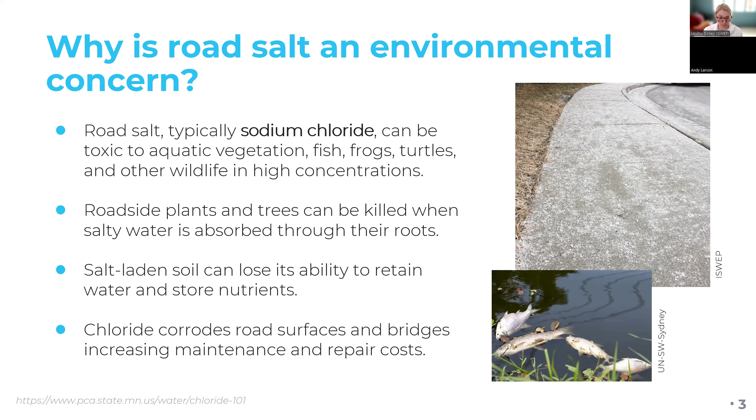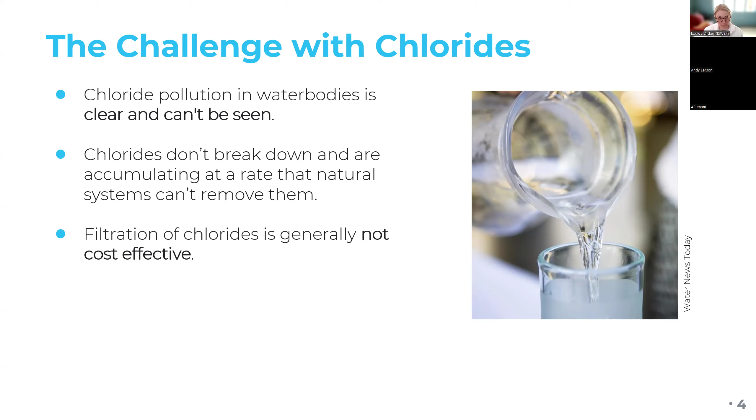Some challenges with chloride include that it is clear, so it dissolves in water and can't be seen. Water may look really clear and clean, but it could still have a high concentration of chloride. Chlorides also don't break down, so they accumulate in our groundwater, water systems, and soils, and there isn't a natural process to remove them. Filtration of chlorides is generally not cost effective - if you think about desalination, it can be very expensive. So we want to avoid getting to that point.

We also know that if we oversalt our streets, parking lots, and sidewalks, that can account for a significant portion of chloride pollution, especially here in the Midwest where we have cold weather. Salt dissolves very easily in water, which means it's very mobile in our environment. Excessive amounts of liquid deicers can also contain carbohydrates, and those can decrease the oxygen available in our water bodies for aquatic life.

Thinking about chloride specifically in Iowa, we are seeing increases in chloride concentrations in our water bodies in Iowa and across the whole US. We do have water sampling conducted here in the States by a myriad of groups, including the EPA, the Iowa DNR, the USGS. We also have a group in Polk County that conducts water sampling. There are also other sources of salts in addition to road salt - things like home water softeners, filtering from water plants, and industrial processes that use salt. Those are also sources that can introduce salt into our surface and groundwaters.

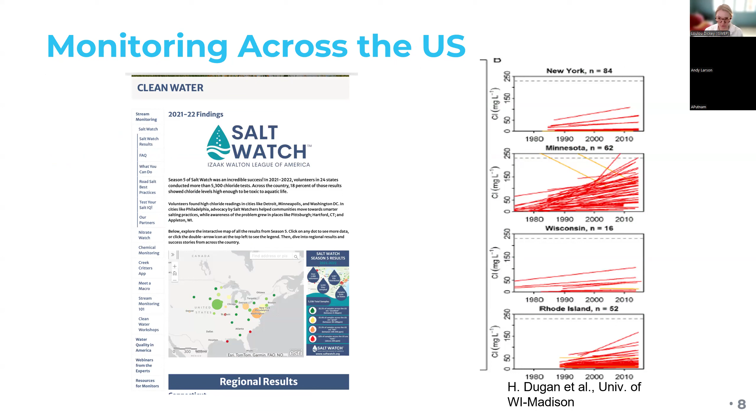The USGS also released a report on road salt use - this is a 2014 report. They found that 84% of urban streams studied had chloride concentrations that increased substantially over the study period from 1960 to 2011. There were numerous streams in the study that exceeded concentrations toxic to aquatic life. These concentrations were highest during the winter, but they also increased during all seasons over time, especially at northern sites. That's because salt builds up in our soils and can be flushed out during rainstorms throughout the season.

Streams with the lowest concentrations of chloride were in watersheds with small amounts of urban land cover. We know that's because we're applying those road salts, especially in our urban areas where we have lots of traffic and cars.

Thinking about water quality standards, especially in Iowa, we do have a water quality standard for chloride, and it provides several different standards based on maximum contaminant level for drinking water, and chronic and acute levels for aquatic life. The goal of these standards is to ensure that all Iowans have surface waters that are fishable and swimmable, and that water resources are protected to put to their best beneficial use.

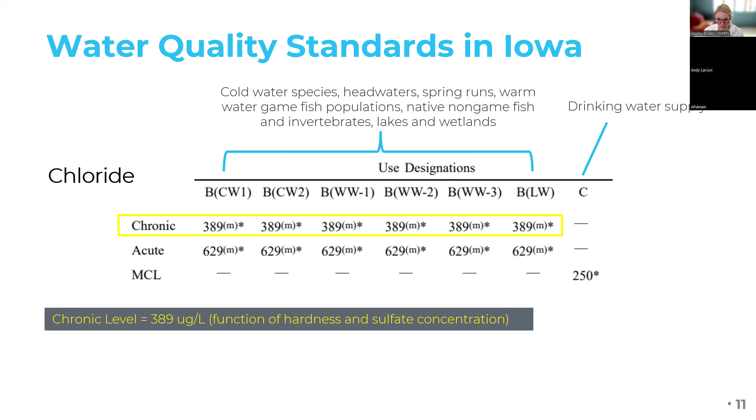Looking at our standards here in the state of Iowa, this first set relates to aquatic life like cold water species, as well as fish and game populations. Then we have our drinking water standard, which is our maximum contaminant level, and that drinking water standard is 250 milligrams per liter.

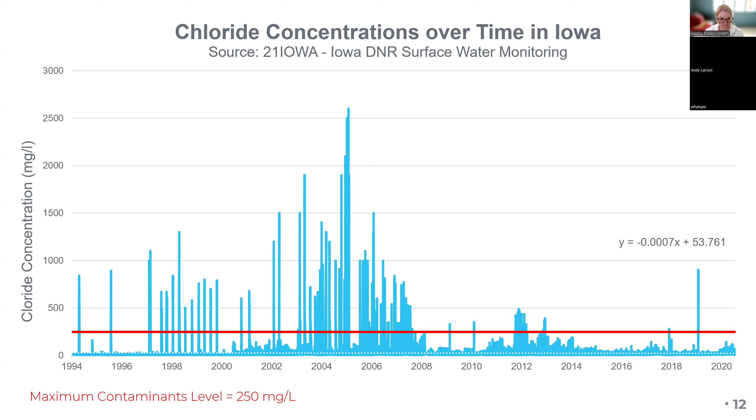Remembering that number, here is data collected by the Iowa DNR. They did surface water monitoring over time in the state of Iowa for chloride concentrations, again in milligrams per liter. That red line represents the 250 milligram per liter maximum contaminant level for drinking water. Over time, that standard is often exceeded by up to over 10 times. So these chloride concentrations can be quite high, and they are pretty seasonal, showing flashy concentrations that usually come down again in the summer months.

Thinking about how wildlife is affected by chlorides, we're in a freshwater system here in Iowa, so our lakes and streams should have naturally low concentrations, between 1 and 100 parts per million, to support aquatic life. However, some species are adapted to higher saline concentrations - ocean fish, for example, can survive in concentrations of up to 35,000 parts per million. This can be important because as our waters get saltier, they can reach a point where they can't support native wildlife, and invasive species can more easily take over in those saltier environments.

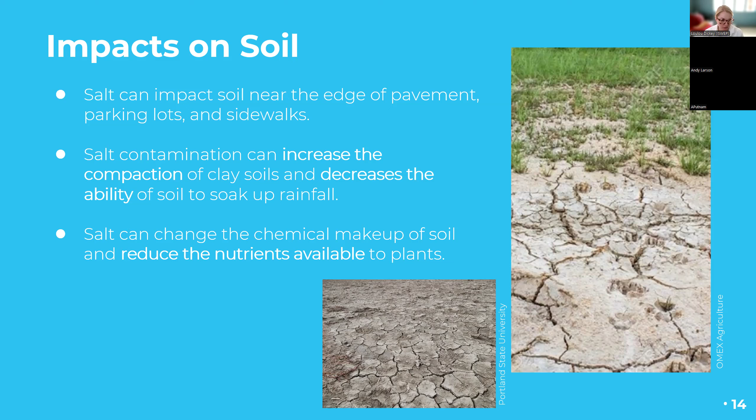Chlorides also have a significant impact on soil. This is particularly true in urban areas with sidewalks and pavements right next to vegetated areas, where salt can easily migrate into the soil. Salts can destroy the structure of the soil, replacing some of the natural minerals that exist there, causing the soil to lose its ability to clump together and become more dispersed. This leads to more compaction of the soil and less pore space available, meaning less infiltration and less space for the oxygen that plants need to uptake. They also change the chemical makeup of our soils and reduce the nutrients available to plants and other microorganisms.

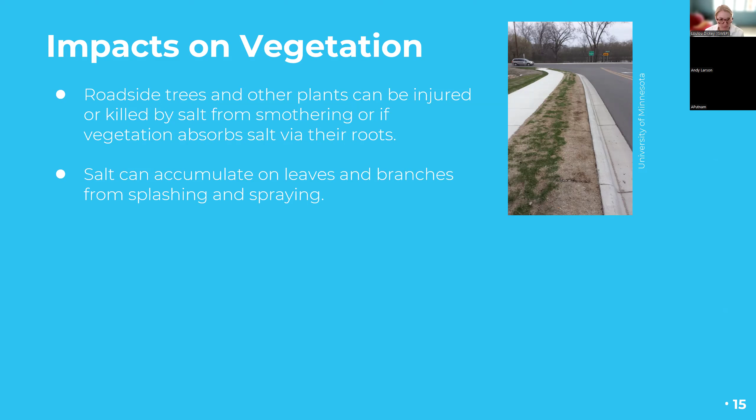We can see effects especially on our roadside vegetation. These can get so bad that it completely kills off all the vegetation - we've seen trees and other plants completely killed off if the salt concentration gets too high. It can also accumulate on plant materials like leaves and branches from splashing and spraying on the road, and it can scorch our leaves. If you've ever seen a tree with a scorched color on the tips of its leaves, that can be caused by salt pollution.

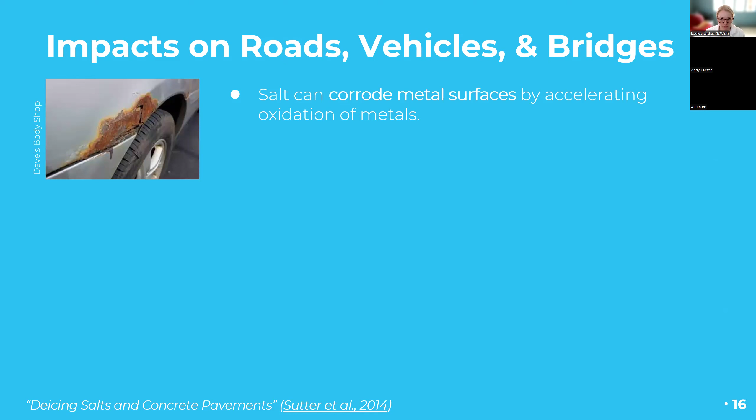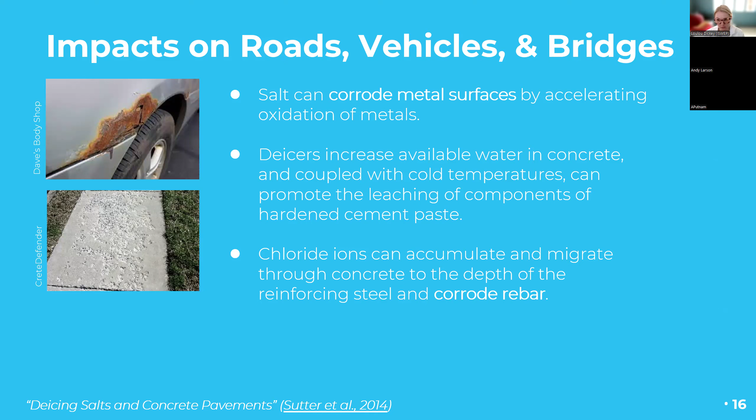Salts also impact our infrastructure - they can damage metal surfaces, accelerating corrosion and oxidation of metals. De-icers can also promote the leaching of components of cement, causing issues we see in this photo. They can migrate through the cement to make contact with the reinforcement steel or rebar, causing corrosion. We can see the effects of oversalting on some cement surfaces - this causes softening of the cement, which can then cause spalling and separation of the aggregates. They can also break down in cracks or crevices, causing disintegration, flaking, and scaling of concrete surfaces.

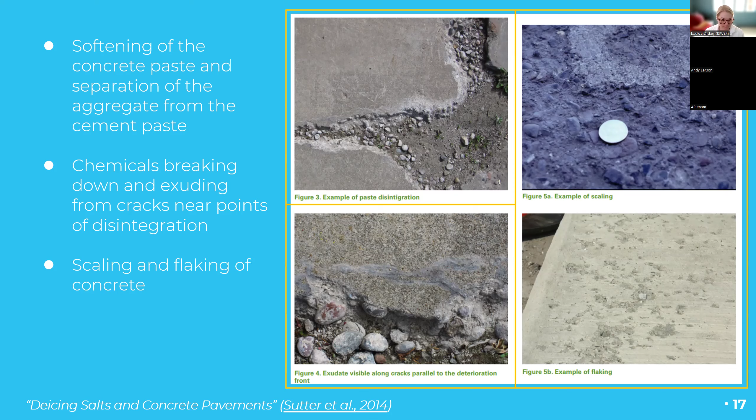Salts also get into our groundwater, which is a big issue when we think about how salts move through the environment. As salt dissolves in water, it gets into our groundwater and flows over time towards our streams. It can also build up in the soil, causing flushing effects during rain events.

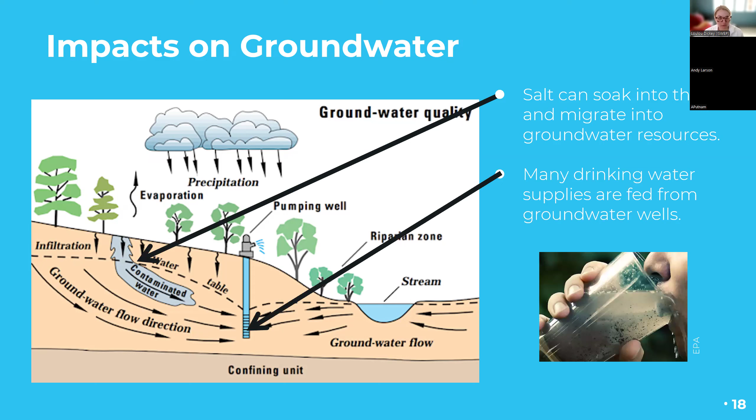And these can have a big impact on our groundwater, or our drinking water, because a lot of our drinking water comes from groundwater sources. And so if we have built up concentrations of chlorides in our groundwater, that can affect our drinking water quality as well. And it's important to note that chlorides can also mobilize other pollutants.

So we're seeing things like heavy metals being mobilized, things like radium that are naturally existing in the soil, are mobilized when the chloride concentration goes up.

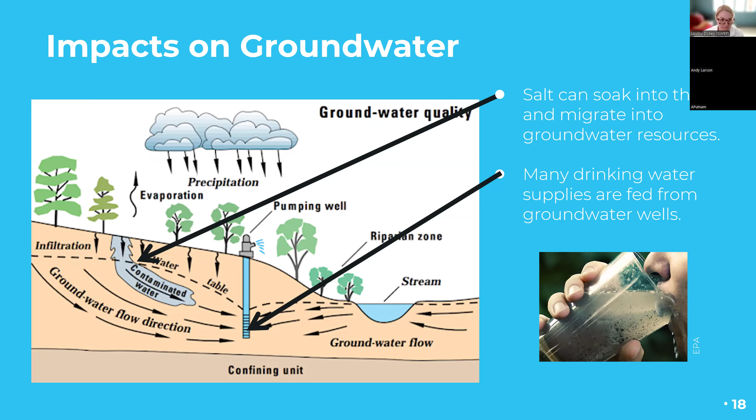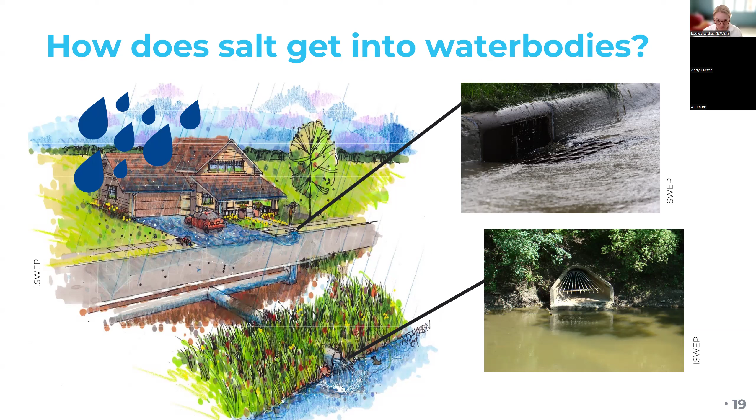And that can also have an effect on our drinking water supplies as well. Other than just the groundwater pollution, salt also goes directly into our water bodies, and that occurs through our storm sewer systems. So if you think about snow melt during the spring, there's going to be a high concentration of those salts on our roadways, and as that water melts, it's going to be flushed into our storm sewer systems. Those systems go directly into our stream with no treatment, so all of that salt will end up in our local water bodies.

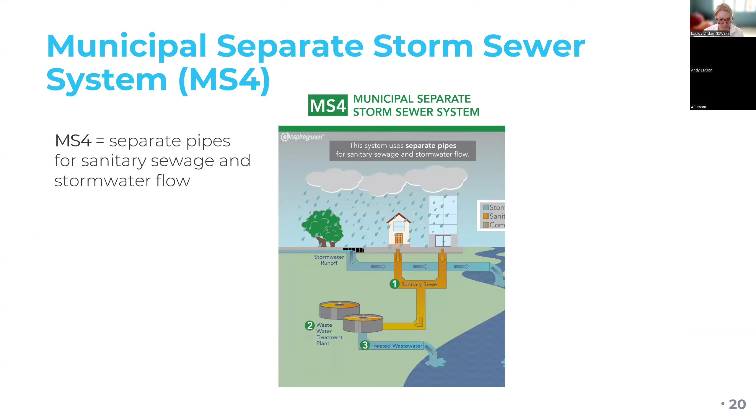And that is important when we think about how these systems are regulated. So our MS4 regulations, many of you are already familiar with those. That applies to our separate storm sewer systems. And we have regulations in the state of Iowa. So there are 44 cities and 3 universities that are regulated under these MS4 regulations. And this is under the National Pollutant Discharge Elimination System, which is a part of the Clean Water Act of 1972.

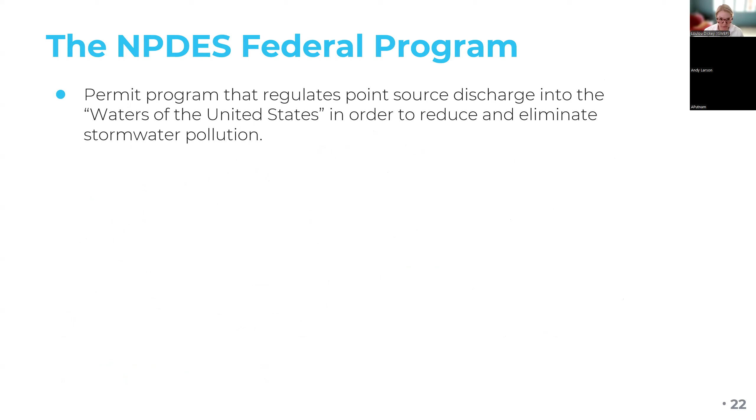And so that means that these systems are required to be permitted and regulated as a point source that discharges into the waters of the US. And so when we think about point source, we're thinking about things like pipes that discharge directly into our streams. And then we also have sources that can be a non-point source, so that's more of a diffuse source like runoff. We think about that more in our agricultural areas.

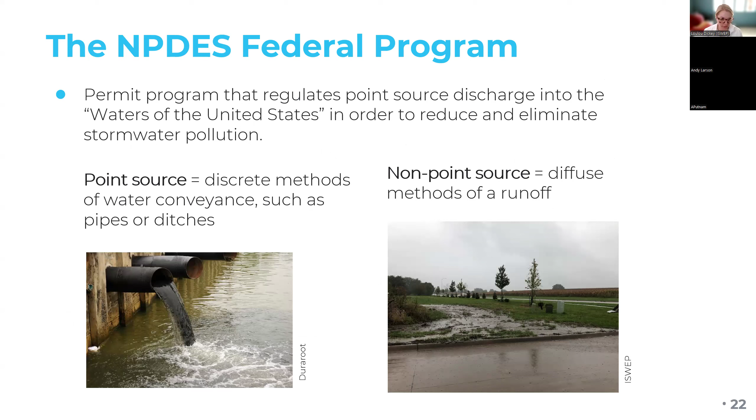And thinking about how those regulations would affect our chloride use, we think about our 6 minimum control measures. This is really going to come in with our third control measure, the illicit discharge detection and elimination. That can apply to things like plumes of salt that could occur from a spill, or salts that are left out in the open and dissolved when there's a rainstorm. And so those illicit discharges are really important to control because that can trigger fines and other regulatory actions.

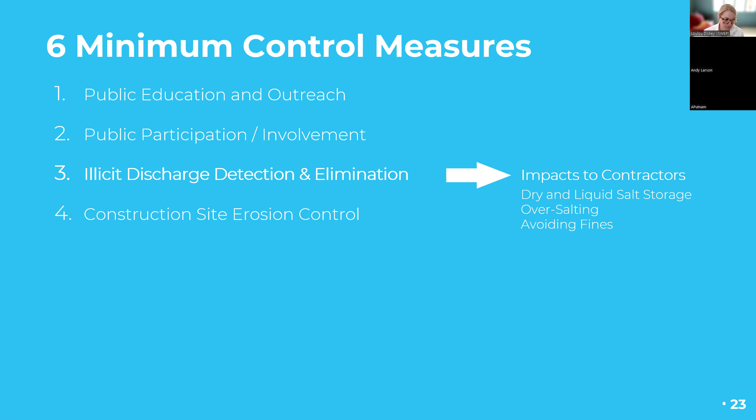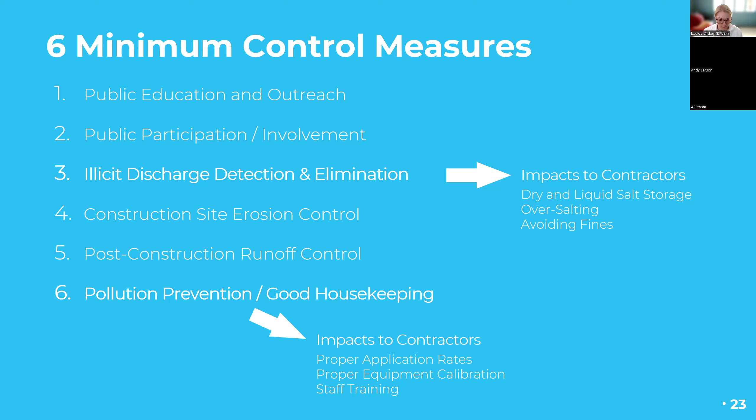We also need to think about it in terms of our pollution prevention and good housekeeping minimum control measure, because that can apply to things like application rates and equipment calibration, as well as our staff training.

So thinking about our illicit discharges, again, those would be kind of the large concentration that's released at once, if you're thinking about a plume. Common sources of those can be things like salt piles, concrete washouts which have different types of salts, soaps and solvents, as well as other things that may be stored outside that could be exposed to rain or have the ability to wash into our storm sewer system.

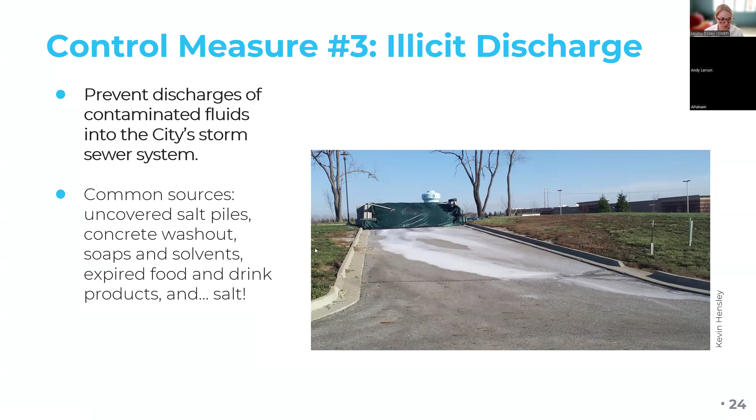And then thinking about our good housekeeping and pollution prevention, we need to think about how we're applying salts. So we're thinking about discharges of contaminated solution into the city's storm sewer system. We know that the salt is susceptible to dissolving during storms, so we want to make sure that we're storing it in a watertight storage container that isn't exposed.

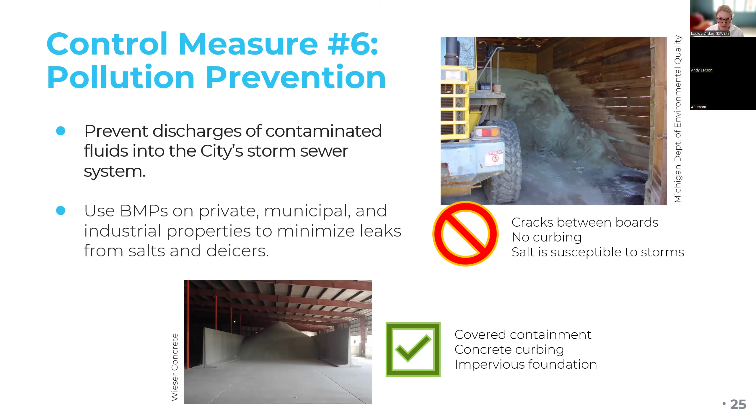We also need to think about how we're preventing leaks from liquid de-icers as well. So inside storage is generally best. We want to make sure that's covered and contained, set on some kind of impervious foundation surface.

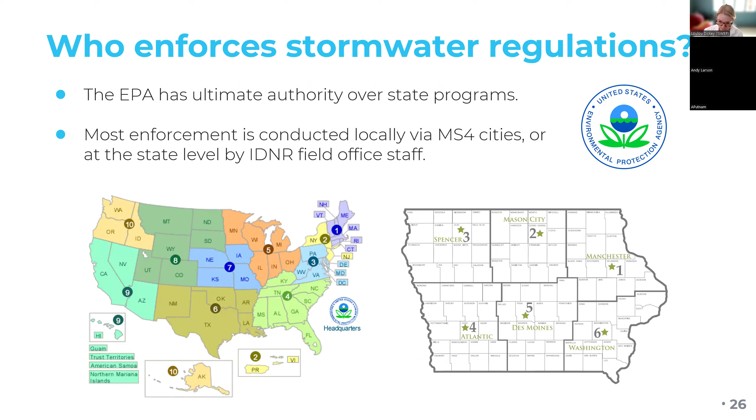And thinking about how these regulations are enforced, the EPA has ultimate authority over the program, but that is enforced by our local DNR. So we have 6 field offices throughout the state, and those field offices have the authority to enforce these regulations related to our minimum control measures.

So we need to think about how this affects different city departments. We know we have our Public Works Department, they may be in charge of the storage, handling, and application of our salt products. The stormwater program within our city is also responsible for permitting, for maintaining that permit and reporting.

And then we need to make sure that we're communicating with our public, doing some public education outreach to raise awareness about salt application. And then any businesses or contractors that apply salt, we need to be communicating those best management practices to them as well, because they can be a large source of these pollution events. So if we have a contractor that's applying salt, they can be responsible for an illicit discharge as well as our residents.

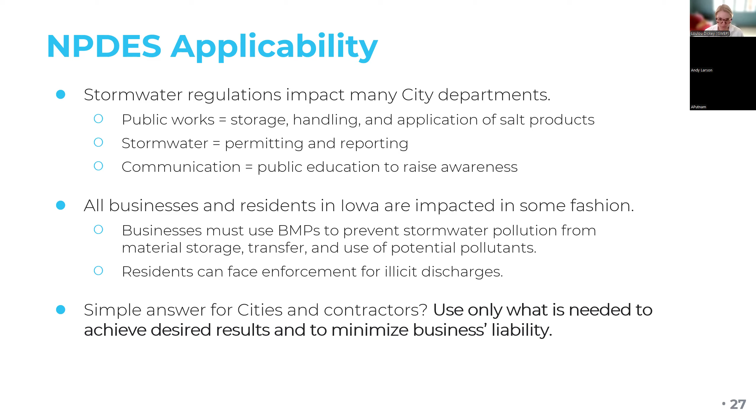And then basically the bottom line that we want to communicate is to use only what is needed to achieve the desired results. So we want to make sure that we're not over applying, and that's important to communicate because many contractors worry about their liability. So making sure that we're communicating with them about the correct application rates is important.

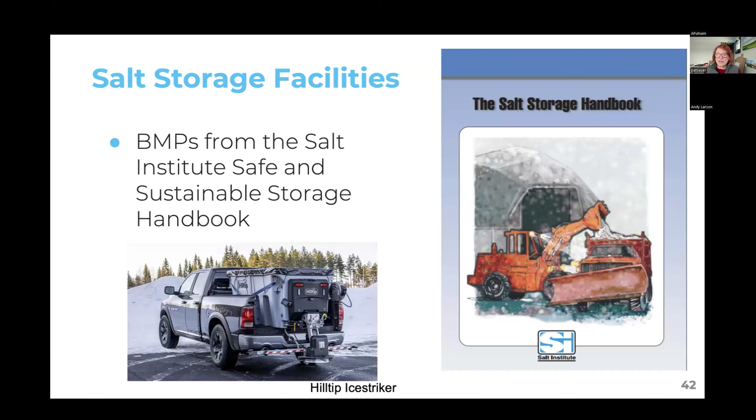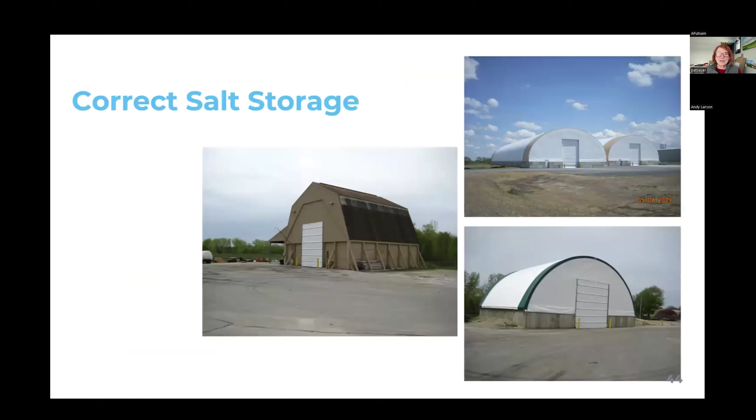There's great guidance available from the Salt Institute. Thinking about it, I believe most cities and counties do this now: covering your salt storage, having a shed or building available for correct salt storage. And then thinking about de-icer storage as well, having secondary containment and such.

So how do they work? They must be able to lower the freezing point of water or the melting point of ice. It would be nice if they do it quickly. They're cheap, readily available, cause no or very little environmental harm. It's easy and safe to handle and distribute, can be stored safely, and can be placed where we need it in the right quantity at the right time, kept there until it has time to work.

Guess what? There is no perfect de-icer that does all of these things.

Here's an important bit of information: when we talk about salt and temperature, the temperature is not the air temperature, it is the pavement temperature. Any reports put out by your local TV or radio, that is all air temperature, not pavement temperature. So that's learning point number one.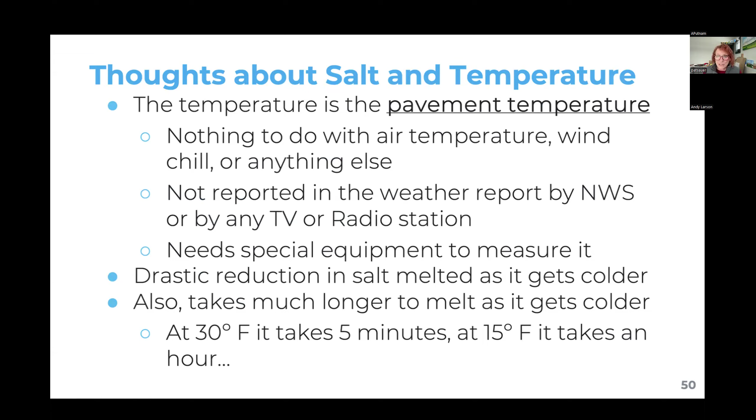Also know there's a dramatic reduction in salt melted as it gets colder, and it takes a lot longer to melt snow and ice the colder the weather. So salt, or any other de-icer, is not used to melt the snow and ice. It is used to break the bond between the snow and the pavement.

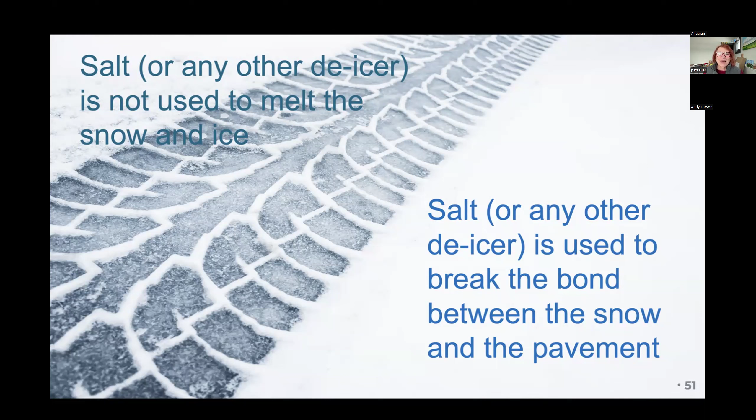Wilf Nixon provided this information: it's about breaking the bond, not James Bond. But anyway, so why does breaking the bond matter?

The number one tool for removing snow and ice is the snowplow, a mechanical method. A well-applied de-icer makes plowing a lot easier and more efficient, and substantially reduces the snow and ice left behind after plowing. So at the very least, that bond should be broken, and it's a lot better if we're using fewer de-icers.

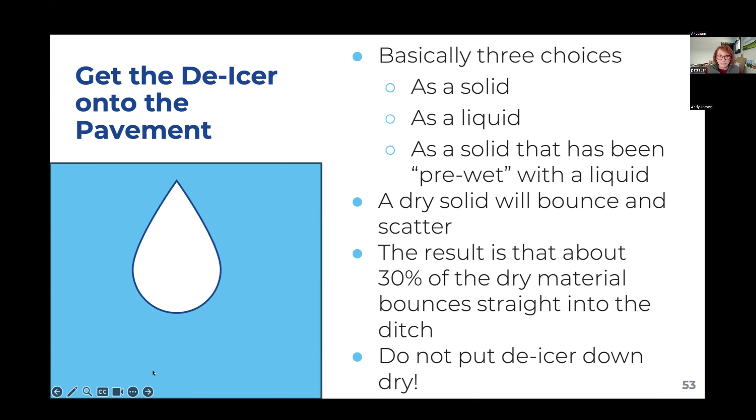You have three choices for de-icers: solid, liquid, and a solid that is pre-wet. A concern with dry solids, which I've seen driving behind some snowplows, is that there's a lot of bounce and scatter, so a lot of that product doesn't go where it should. This can result in about 30% of the dry material bouncing straight into the ditch. Do not put de-icer down dry.

So the technology has evolved to pre-wet the solid form. You can buy pre-wetted treated solids. Some products are salt coated in a liquid, which can be stored in its coated condition. And by the way, bounce and scatter is not the only reason to add liquid to your de-icer.

The other reason is that the liquid or water activates it. Remember we showed how long it takes for salt to melt ice at lower temperatures—a lot of that time is the salt going into solution. So when the salt is wetted, you're jump-starting this solution process, and as a result, you're going to need less salt.

So why not just use liquid form? You can, but you're going to need equipment enhancements in order to do that, and there are some drawbacks to be aware of before you take the liquid-only plunge.

So some agencies are making some of their routes liquid only and have had a lot of success. So there is the anti-icing and pre-wetting. I think a lot of you have seen when you go down a roadway, some communities are doing this process already. They're anti-icing, spraying the brine on the pavement surface prior to an anticipated storm. So this is just some additional information to take a look at.

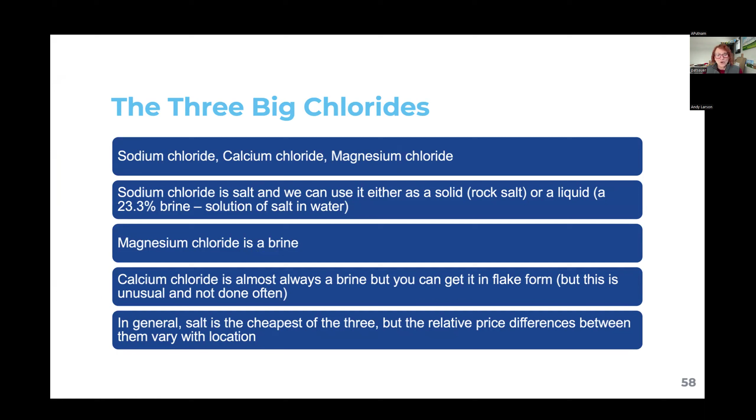Looking at other chlorides: sodium chloride, most commonly used, the cheapest chloride that is being used. Calcium chloride is also used, and magnesium chloride, commonly called mag chloride. Sodium chloride is a salt we can use either as a solid or liquid brine, 23.3% brine. Magnesium chloride is also a brine. Calcium chloride is almost always a brine, but it's available in flake form as well, though not used very often. So guess what - sodium chloride is the cheapest of the three.

The non-chlorides are potassium acetate and calcium magnesium acetate. They don't have the corrosion properties of chlorides, but guess what - they can impact water bodies as well. They can create an oxygen demand, which will impact your aquatic life.

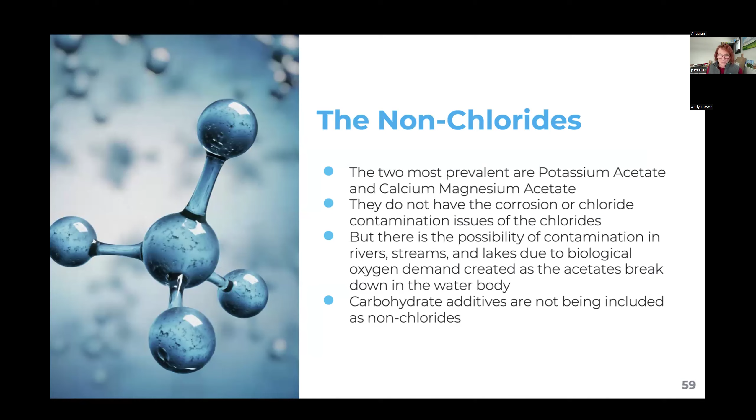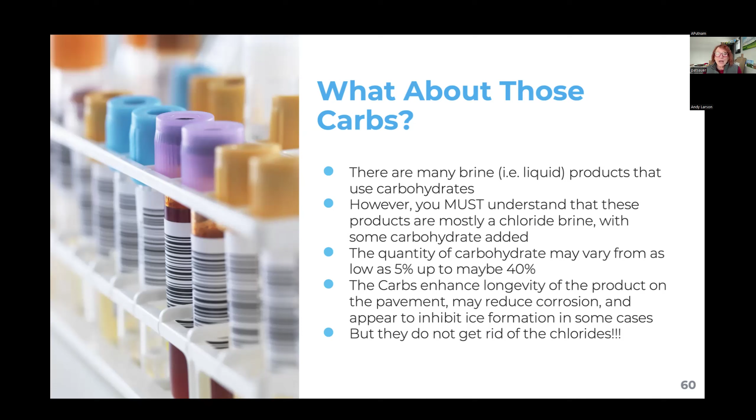And then there are the carbohydrate products. Some of you have heard about beet, soy-based products. They're carbohydrate based, but typically they're being used along with a chloride brine. The quantity of carbohydrate can vary from as low as 5 up to 40%. They enhance the longevity of the product on the pavement, but you're not getting rid of the chlorides.

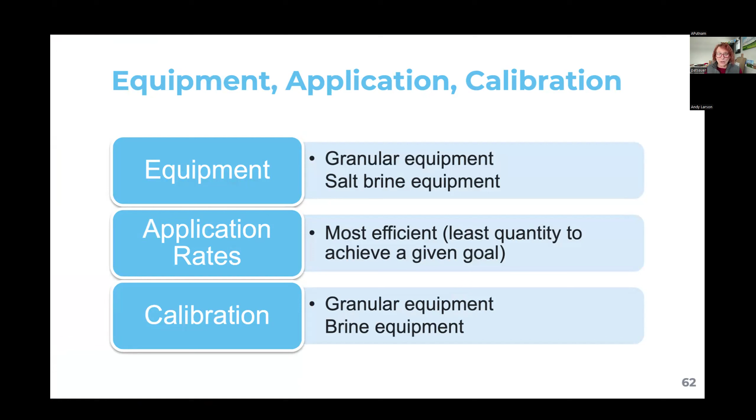Equipment, application, and calibration. When you're looking at equipment, what type of product - granular equipment or salt brine equipment - and then application rates: what is the least quantity to achieve a given goal? And then calibration. Yes, you can calibrate equipment used for granular sodium chloride or brine.

When looking at equipment considerations, use of granular salt on roads, sidewalks, and parking lots - for smaller applications there are hand spreaders, walk-behind spreaders, UTV spreaders, slide-in spreaders for trucks. I haven't seen anyone use a hand spreader though. Often what we're really trying to get away from is having that pail of salt by the front entrance with a big cup or scoop out there - it's just massive overloading of chlorides.

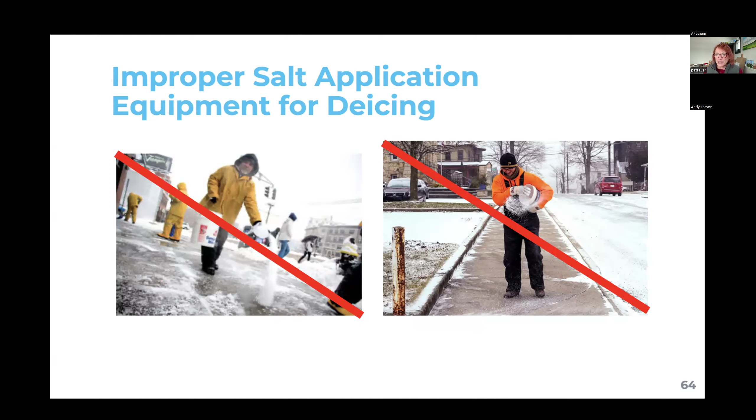Liquid or brine applications - you're looking at spray nozzles for sidewalks with a streamer nozzle. This is what we're trying to avoid: no following of application rates, thinking more is better when indeed it's not. There's a lot of different equipment - slide-in spreaders on a pickup, single axle and tandem dump trucks for roads. For liquids, you can take it down to a small scale sprayer, and there are truck mounted systems available for smaller applications for contractors.

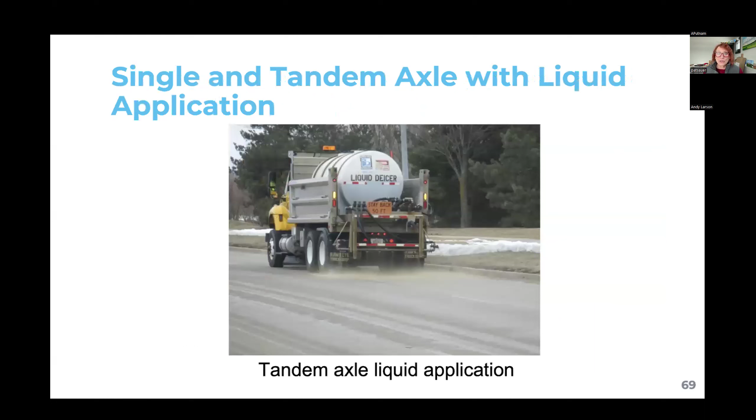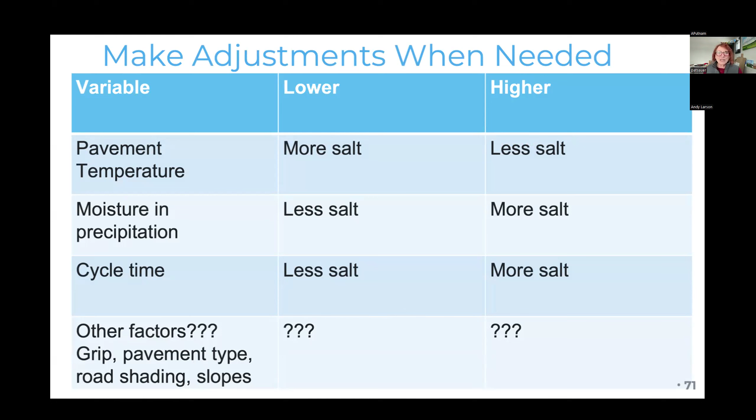Application rates need adjustments when needed - rates for salt, rates for liquid. Here we're looking at the variables: pavement temperature, moisture in precipitation, cycle time, and also grip, pavement type, etc. You need to be aware of those when deciding to use more salt or less salt, and the pavement temperatures.

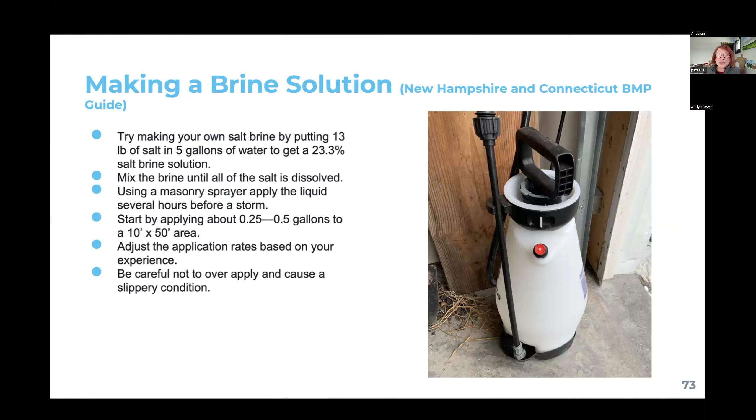You can also have contractors make brine solutions - there's nice guidance available put out by New Hampshire and Connecticut, with a BMP guide that is available. And then even brine application rates for pickup applicators - this is pulled from Minnesota, covering mag chloride, salt brine, and other products.

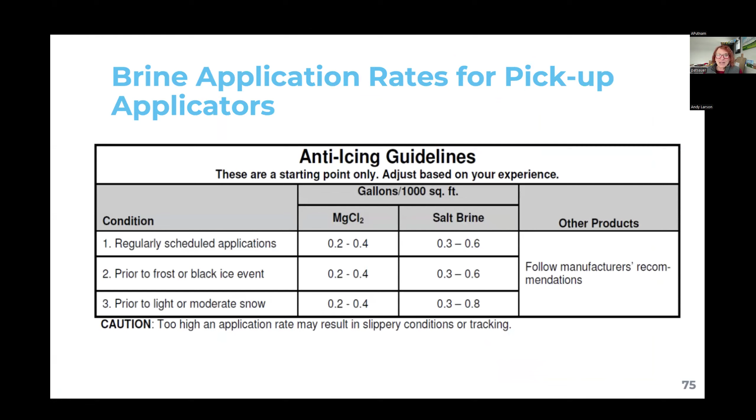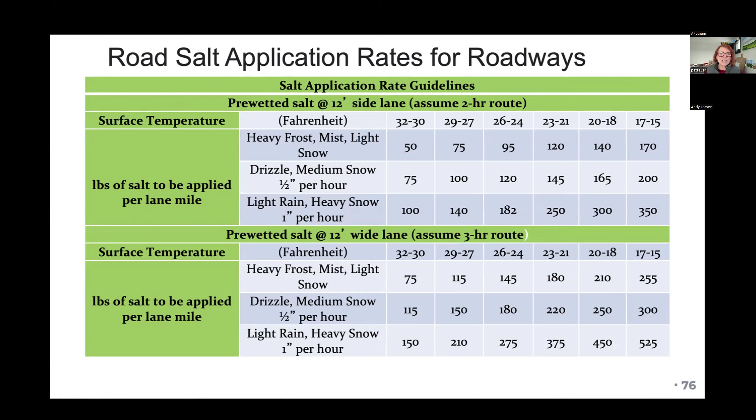Here's road salt application rates for roadways, looking at the temperatures and weather conditions as well. And it is going to vary - not every weather condition is going to be the same, if you have sleet, snow, and such.

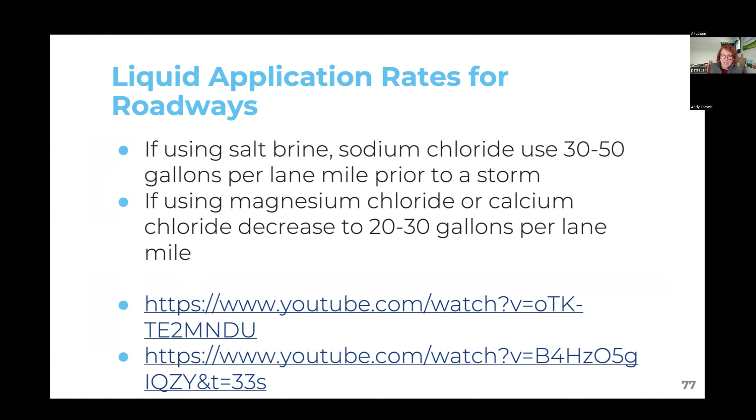So liquid application rates for roadways - if you're using salt brine, sodium chloride, use 30 to 50 gallons per lane mile prior to a storm. If using magnesium chloride, here's the recommendation, and there are some YouTube videos for guidance. Why do we want to calibrate? That was application rates - now we're getting to calibration, which is really important as well.

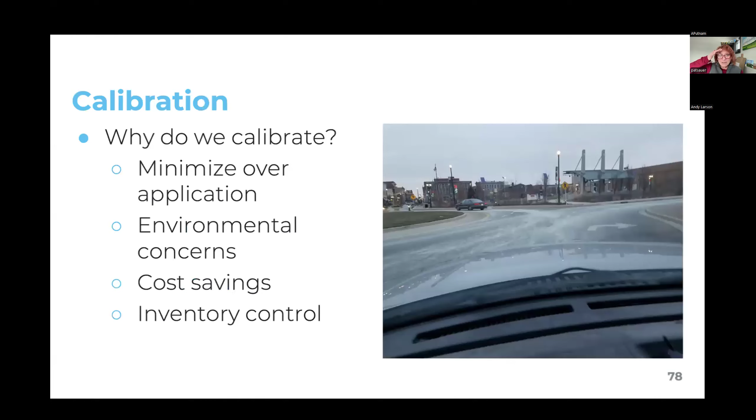You want to minimize over-application, environmental impacts, and it'll lead to cost savings and inventory control. So the equipment needed, we won't spend a lot of time on this.

You need to scale to weigh the salt, collection device, marking device, and a stopwatch. I don't have time to go into a lot of details, but you can calibrate any equipment, including a walk-behind spreader. It's just something that should be done. I know a number of cities and counties do this routinely, but I've also found out some are not.

Finally, weather forecasting and pavement temperatures. I talk about the importance of this because it's based on performance of the salts, de-icers, and even the anti-icing process. It's based on pavement temperature. So here are your options. Yes, you're going to get National Weather Service information, but that is air temperature. It is not pavement temperature.

IDOT provides guidance, which I will show you, and this needs to be shared with contractors and city staff. There are also paid forecasting companies. There are apps, there's software that is available as well, and I know some of our member cities are using that.

Shown is IDOT monitoring. They have these different monitoring sites. You just go to IDOT's website and can obtain this information. If I can do it, you can do it. There are different monitoring sites across the state, and we're seeing this table that has road temperatures, telling you the location, precipitation, and sky conditions as well.

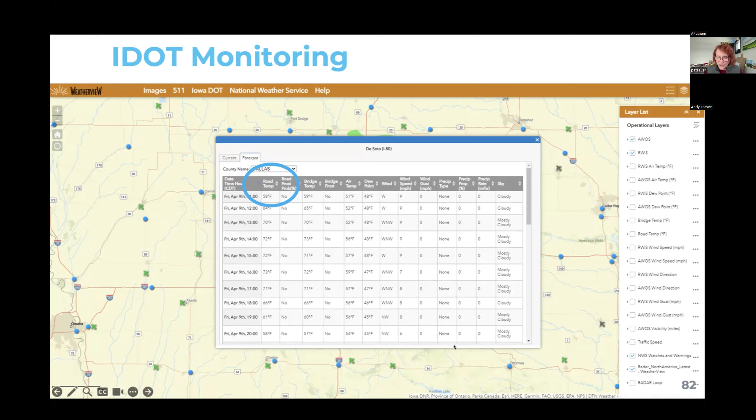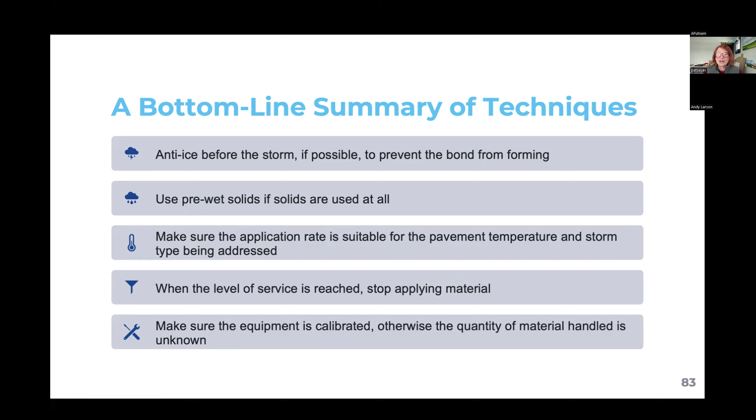Bottom line, the recommendation from the industry is to anti-ice before the storm if possible, because you're trying to prevent the bond from forming. Use pre-wet solids if solids are used. Make sure the application rate is suitable for the pavement temperature and the storm type being addressed, and we provided tables of that information. When the level of service is reached, stop applying material. And of course, make sure the equipment is calibrated, otherwise you don't know the quantity of material handled.

So we do offer this training. We've done it about three or four times. West Des Moines was the first city to hold this training locally. Typically, we come in and do this in person, with city staff and maybe Parks Department staff there, as well as we try to get some of the contractors there.

Any maybe big box stores and hospitals that hire contractors. So we do have an event in person on March 6th in Coralville. We don't have the venue yet, but Lulu's getting really close to getting a response back from the city of Coralville. Wilf Nixon will be teaching that class. He is the guru, one of the gurus in Iowa for salt application and winter applications.

We typically do this in person, or we can do it webinar based. We are looking at in the near future of creating an on-demand training. We'll break this up into modules because some of our members have said some of their staff can't sit down and watch the whole thing. It's about four hours worth of training, but they could watch parts of it. You can gain more information at iowastormwater.org.

If you want a case study, I'm gathering some information from Iowa, but I just didn't get it in time. But on Minnesota Pollution Control Agency's website, they promote that both Minnesota and Wisconsin have salt training programs, because they've done considerable monitoring and found significant impacts on their water bodies, especially in urban areas. City of Plymouth is located near Parker Lake.

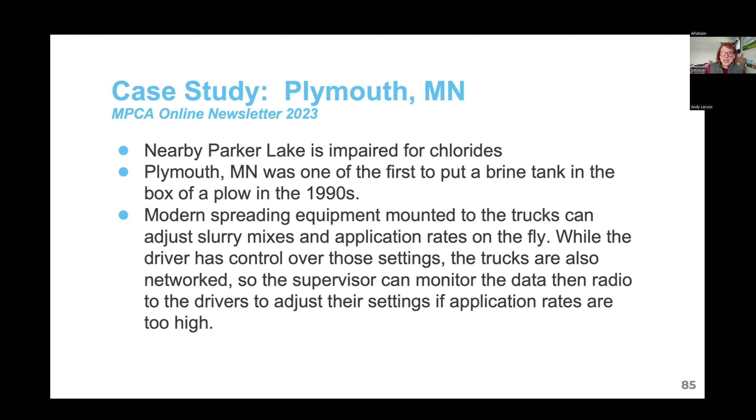It's impaired for chlorides. They were one of the first in Minnesota to put a brine tank on the box of a plow. They've modernized their spreading equipment. They also have it so while a driver has control over these settings, they can be networked so a supervisor can monitor their information and just adjust the application rates. So they've come up with this, and they don't have a blanket bare pavement policy - they aim for bare pavement on the main roads, hills, and bridges, but for everything else, they will just scrape.

So they've made this decision as a city. They have been able to monitor and come up with, over the last 10 years, a decrease in salt use, and they anticipated in 2022, that really snowy year, they were able to spend $38,000 less on salt than what was budgeted, due to their efficiencies and changes in policies. That is what I have for you.